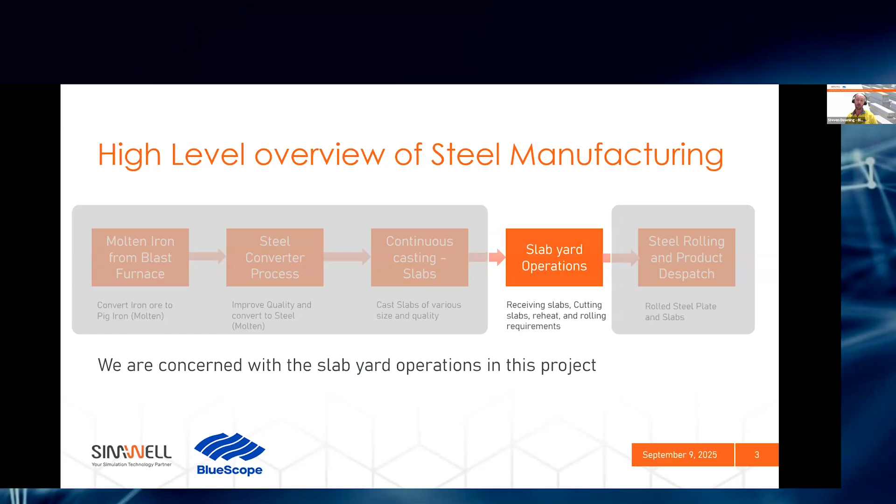Those slabs are then moved to a large warehousing processing area we call the slab yard. And from there, the slab yard takes those slabs and puts them into one of our two hot rolling processes. Here in Port Kembla, we have a large hot strip mill making coiled products and a significant plate mill. So today's investigation is around our plate mill operations and how the interactions occur between a large project in the plate mill and the slab yard.

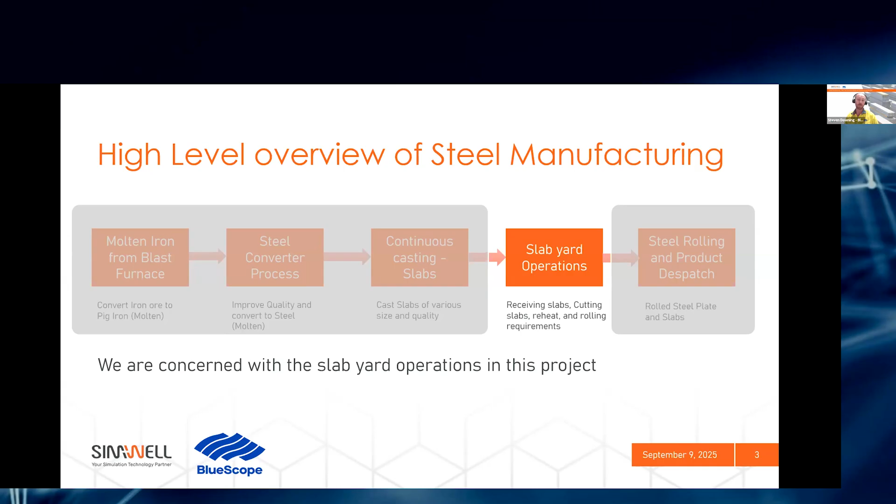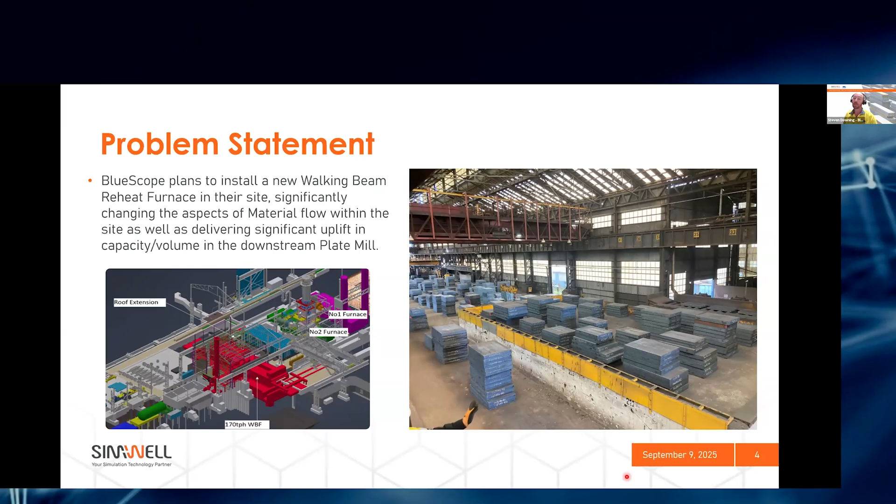So if we could continue on, this introduction of a very large new structure in this warehousing processing facility straight away threw up some concerns around the impact on their operations. We were going to increase demand, so throughput through that yard was going to significantly increase with increasing demand in the local market, as well as increasing capacity from the new furnace. And it was also going to have the corresponding effect of reducing the storage that they had to work with. So it was going to make things difficult on two fronts for the slab yard.

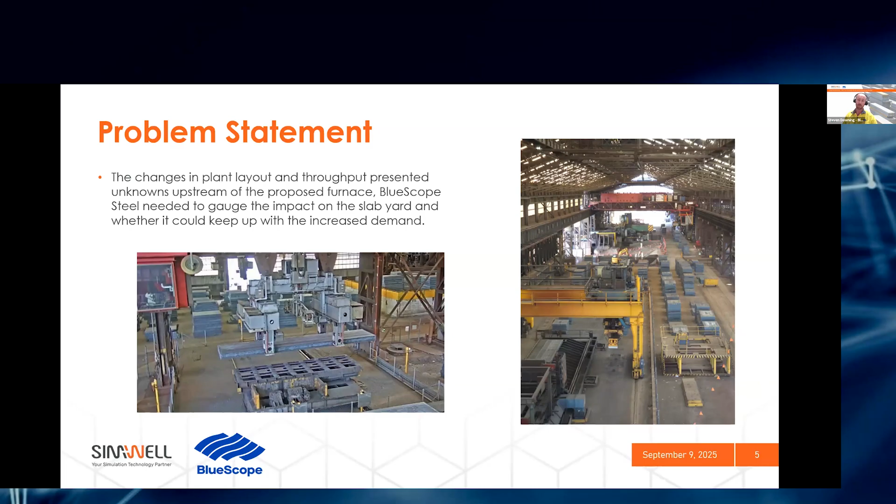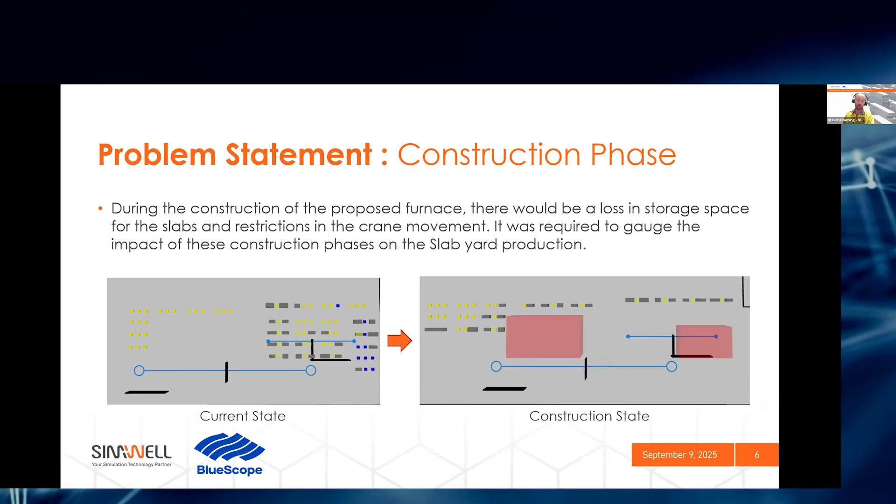And we've had to introduce these red blocks, which represent some of the old and certainly lots of the new structure, which the cranes cannot pass over. So it makes it much more difficult. The length of travel and time to provide slabs to our furnaces will be greatly increased. So the problem was straight away complex. Some people might say it's just a warehouse, but there's a lot of inventory management and processing of our slabs occurring. For instance, our slabs actually arrive as 12-meter slabs, and they have to be subdivided down to approximately 2.5 to 3 meters to be able to be entered into our process at the plate mill.

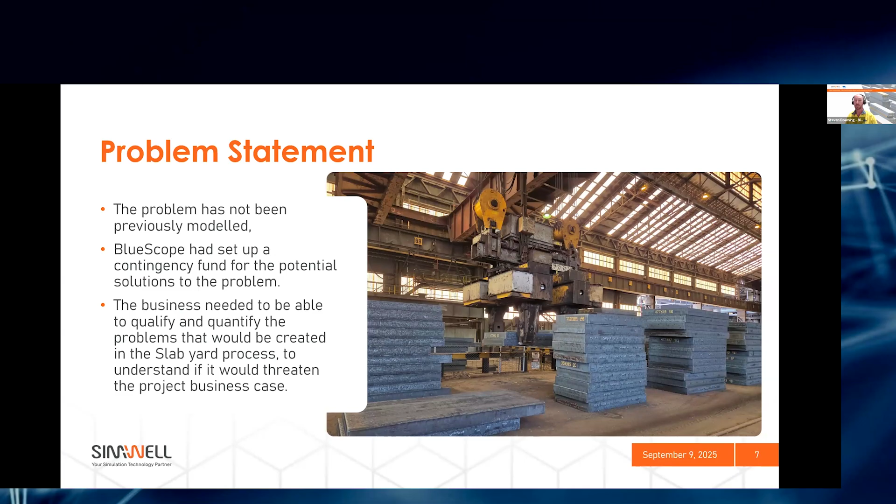We knew we were going to have to meet this challenge, but our project was also well underway. So we established a contingency fund in excess of tens of millions of dollars, without an actual clear picture of what the solution would be, but also not exactly a clear picture of the problem. So we needed to set out with an approach that could both qualify and quantify the problem that would be created in the slab yard processes, and to understand how that might threaten our overall business case and what the solutions might look like.

So to summarize some of the key points of those challenges: as I've mentioned, the increase in production throughput volume through the yards, and the loss of the storage space, making that increase even more difficult to deal with. The modeling of the cranes is essential to this process. As a warehouse, the cranes are the lifeblood of that. And we have very closely controlled interactions, which previous modeling of other crane processes in other projects has revealed to us would be a difficult and not a simple item to model. Then as well, there's the priority tasking of those cranes. It needs to be dynamic. The priority one moment might be one way and then need to be overwritten to a different priority as the emerging process changes.

Due to the restrictions, particularly during the construction phase, there were a number of areas that the cranes had to be forced to avoid to keep people safe, and also to keep equipment from potentially being destroyed if a slab was to drop. And then there's, of course, modeling and managing the transfer car, as there are 2 yards in this setup. So we need to manage the inventory between both of those and the space that the slabs occupy. And as I've mentioned before, modeling of the slab cutting process, which is essentially a process within the process that needed to have its own representative structure.

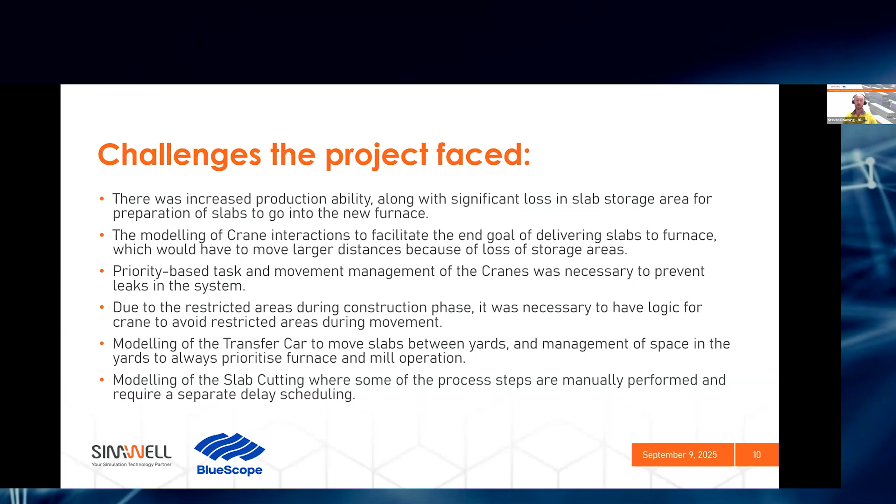As we continue, so why simulation. It became very clear to us very quickly that there was no spreadsheet exercise that was going to lay out our problem and give us the granularity or understanding of what we needed. We needed detailed, complex process modeling.

The range of requirements, the rates, the competing rates between our rolling process versus the heating process that was required, versus the throughput through our cutting, our inventory management, versus the completely seemingly disconnected process of how the slabs enter the yard. All of that just couldn't be made up from artificial schedules.

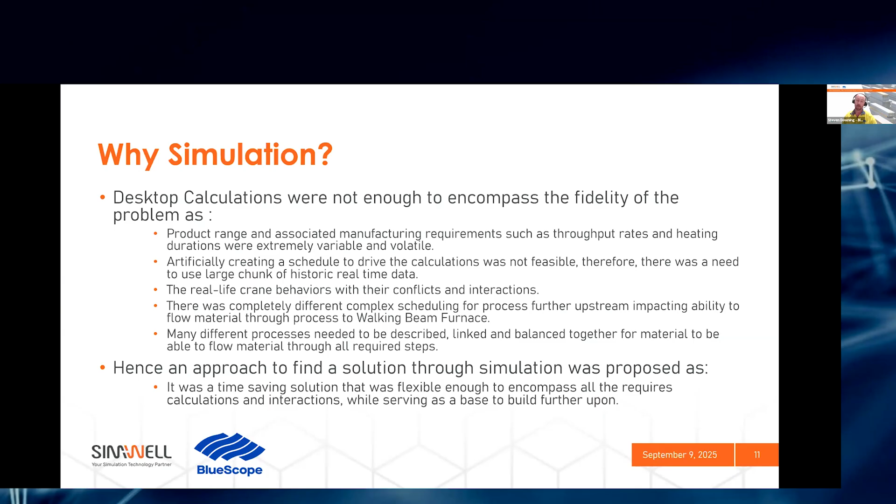Then you add on top of that the imperative need to have real-life crane behavior in those models to achieve the efficiencies that we would need and what we actually do achieve. And the complexities of running all those different separate schedules from start to finish in the process, and keeping that all balanced along with our inventory, not exceeding any limits or depleting in different areas. Hence, a simulation was the only way forward.

And so AnyLogic has long been the software of choice in BlueScope. In fact, it was the only processing simulation software that we will allow any of our areas to engage with. So that led to us engaging with SimWell, a great fit for us, a natural choice for their experience with AnyLogic and their ability to deliver on and meet the complex requirements that we had. So I'll pass that back to Siobhan.

Thanks a lot, Stephen, for the beautiful introduction. Other than the familiarity and experience SimWell has with AnyLogic, there were a lot of technical advantages that AnyLogic would have provided us with in the context of this project. The model needed custom agents, as Stephen explained, to adequately represent the complexity and interaction between the cranes and other equipment in the slab yard. With the added ability to combine agent-to-agent communication, agent-based modeling, and discrete-event modeling, AnyLogic proved to be a tool that made this complex interaction smoother to implement.

As it is a code-based environment as well, with the added ability to modularize the code components to further build upon, it was a no-brainer to go ahead with AnyLogic, as we were going to do further scenarios to build upon. And now let's get into the technical bits of the model.

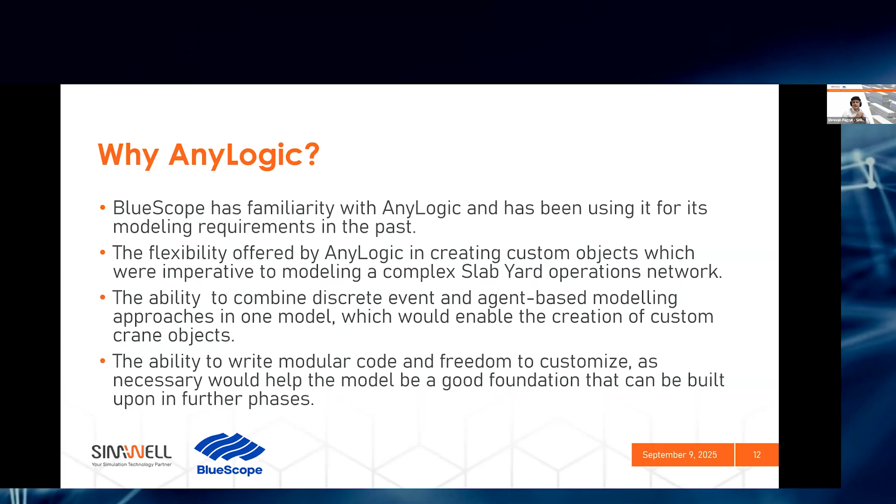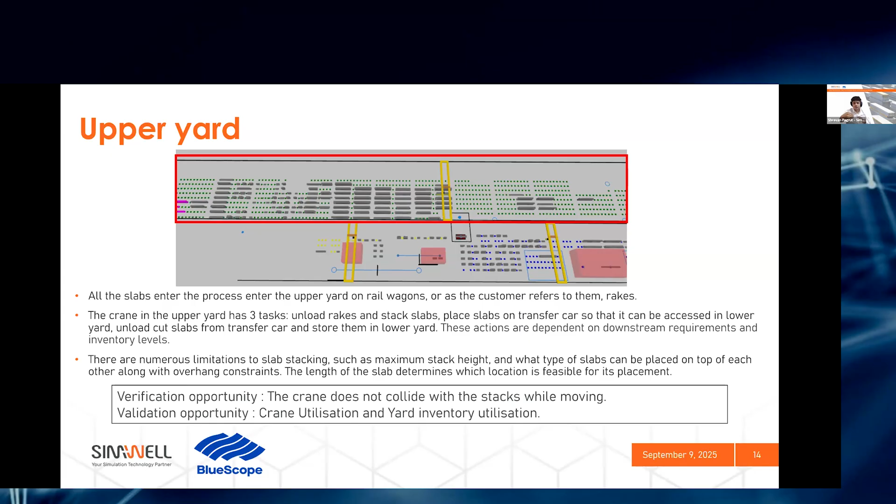The stacking of slabs is determined by the maximum stack height, the dimensions of the slab, and there are overhang constraints as well, which define how much a slab can stick out beyond a particular limit. The upper yard crane moves the slabs from rakes to the yard, as well as from the yard to the transfer car, and from the transfer car to the yard as the transfer is required.

Going deeper into the rakes, the slabs come into the upper yard on rakes, as I mentioned. When a rake comes in, a request is sent to the cranes, and depending on what the crane is doing at the time, it determines the priority of the tasks, and it starts unloading one wagon at a time. You'll see slabs have arrived on these yellow wagons, and these blue ones are the slabs, and you'll see that the crane is moving to unload the wagons.

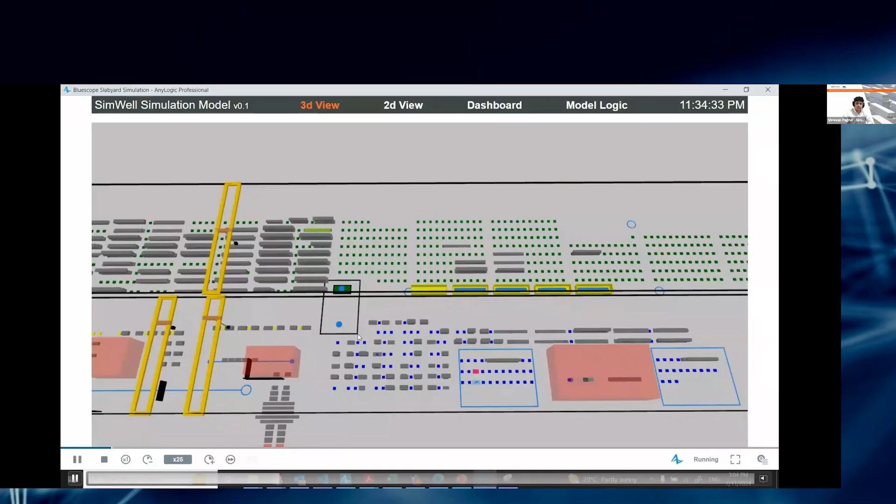The lower yard is basically where the bulk of the slab movement and processing happens. Bigger slabs enter from the upper yard through the transfer car. From here, they enter the lower yard, and these slabs then move into the slab cutter on the bottom right here, where they are subdivided into smaller slabs as per requirement. The movement of all of these slabs is based on a fixed sequence that needs to be charged into the furnace over here, which drives the slabs being cut and transported.

After being cut, they are transported to an assembly area. So after the cutting here, they are transported here into the assembly area, after which they are transported to the charging area. As Stephen mentioned, charging is the process of putting the slabs in the furnace, to simplify it a bit.

This charging is being done by the left crane that you see over here, which is a magnet crane, so it can only pick up one slab at a time, while the right crane that you see over here is a tong crane, so it can pick up multiple slabs at a time. So we try to bring multiple slabs into the charging area, but we need to make sure that they're in the correct sequence.

So the top slab is the next required in the furnace, so that we're not asking the left crane, which can only pick one at a time, to do digging and find the slab that it needs to. It's just always available to it on the top.

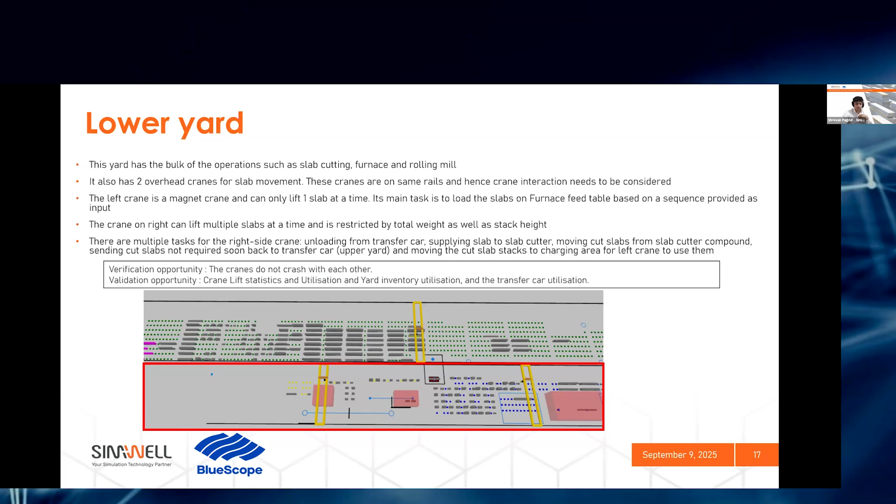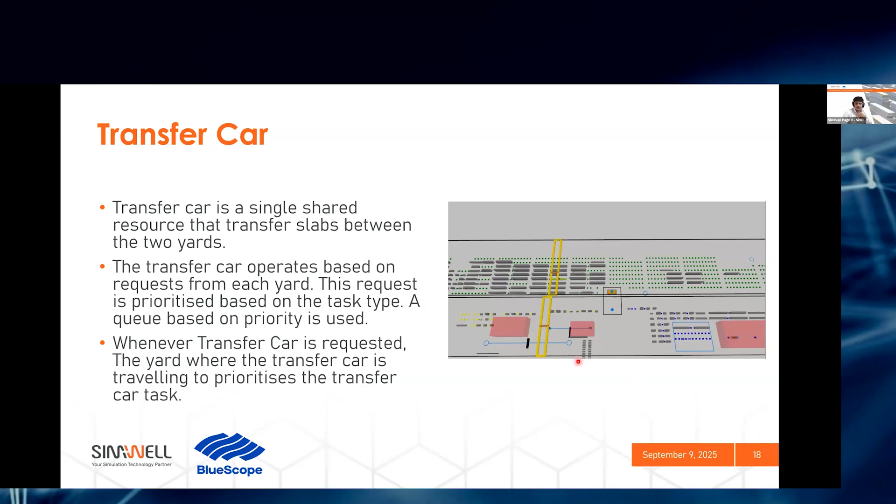The transfer car is another important component which handles movement between the yards, and as it is a single shared resource between the yards, it is necessary to model the working and utilization of the transfer car correctly. The transfer car operates on two layers of priority. When a task comes in, it is put in a queue ordered by the priority of the task inside the transfer car, and when a transfer car picks up a task according to the priority, the yard where the transfer car is prioritizes the task to supply to the transfer car.

So here you'll see the transfer car is in the upper yard and it wants a slab. So the crane brings in a slab. That slab moves to the lower yard, and then the right crane in the lower yard basically prioritizes moving out the slab from the transfer car so that we can have the transfer car free as quickly as possible.

The slab cutter, as Stephen explained, is a process inside the process. So it's an operation within the operation, sort of, where it has a cutter with two beds. So here you'll see that we have two beds over here. And there is also a crane that moves inside this compound, which is marked by the blue rectangles, to load and unload the main cutting process.

The crane movements have not been modeled physically, but as a mathematical calculation of the movement time, because there were a lot of manual processes and interactions there. So it was decided that it was better to model it as a mathematical calculation of the time.

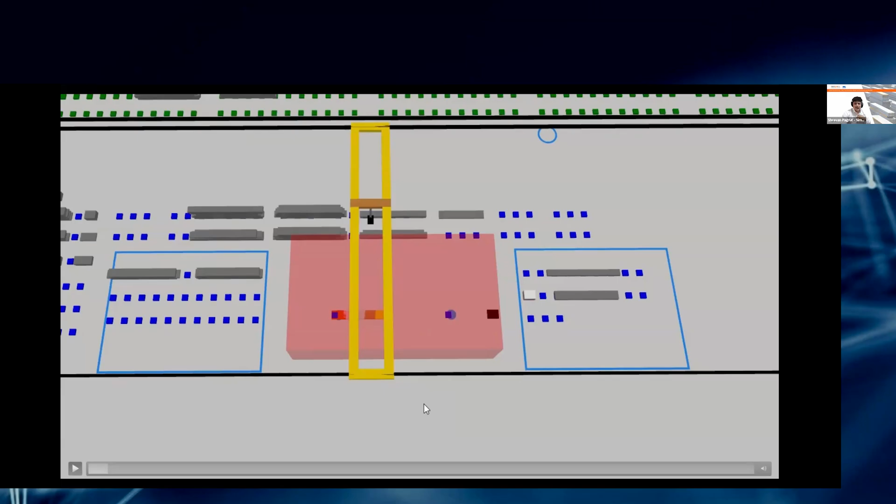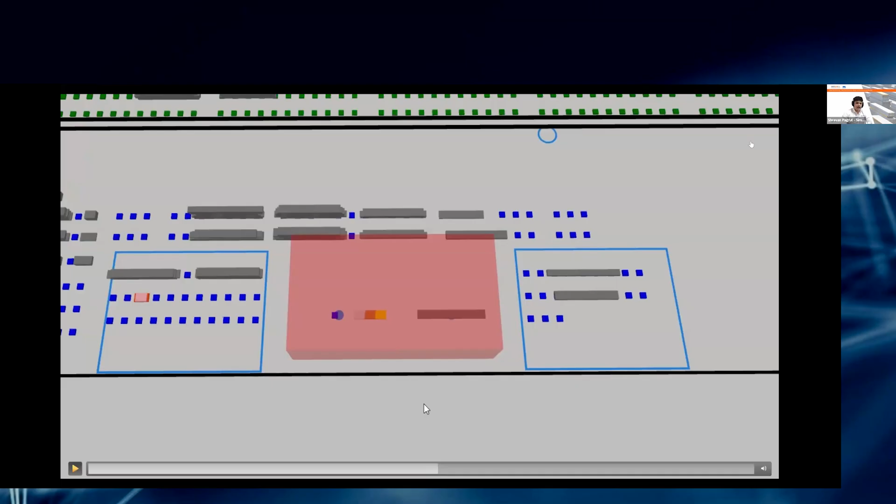And here you'll see that a slab is loaded onto the right cutting bed. So you'll see a slab magically appear, which is the mathematical calculation. And then it is subdivided as the slabs on the left side have already been done. And then these will be unloaded, as you can see, on the compound area, after which the right crane in the lower yard will pick it up and move it to the assembly area.

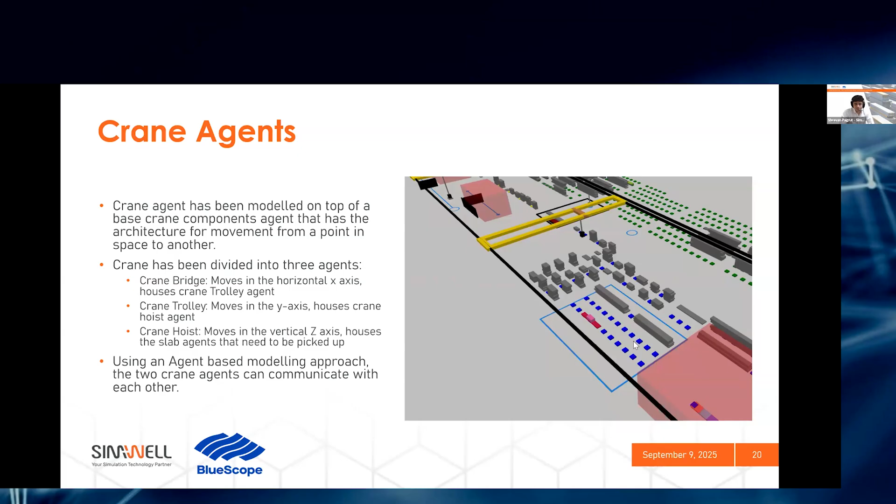The crane being an important part of the slab yard, it had to have a bunch of custom movement patterns to it. Hence, a from-scratch approach was used to model it. And it was decided that it would be hierarchical in nature, where we'll have a base agent and we'll build on top of it. And here we have basically a crane base agent, then we have the crane bridge, a crane trolley, and a crane hoist on top of it, which have their own movements. So the crane bridge will move in the x-axis, the crane trolley moves in the y-axis inside the bridge, and then the hoist moves in the z-axis to pick up the slab, which will be better explained in this video.

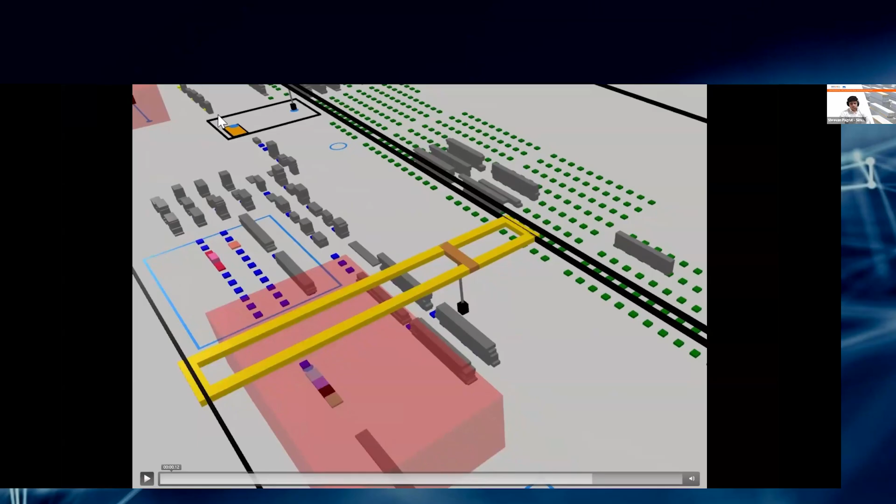Here you'll see that the crane needs to put a slab somewhere. So first it positions itself over the stack where it needs to put the slab into, and it first moves its X, which is the crane bridge, the yellow part you see here, then the trolley, which is the brown rectangle that you see, and then the hoist will be lowered to put the slab into the stack it needs to.

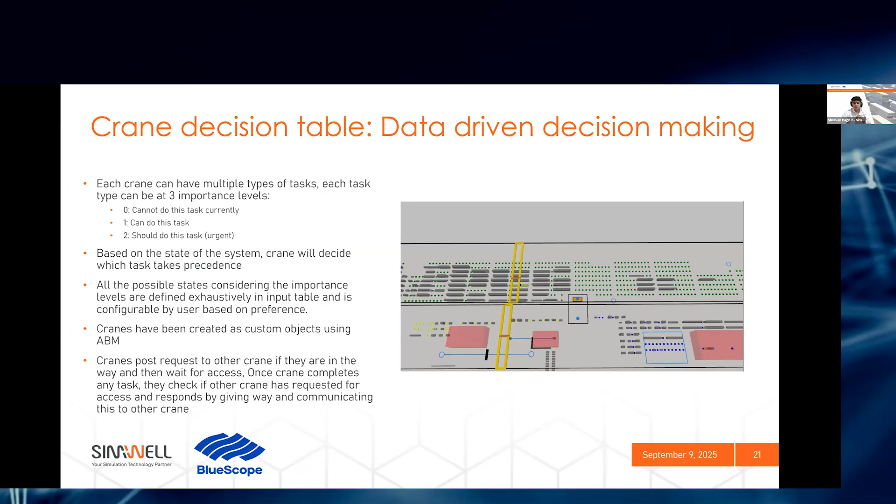And as the cranes have to do a variety of tasks, as Steven said, it is important that the crane picks up the task that is correct, so that we are ensuring efficient supply of slabs to the furnace and thus efficient working of the slab yard. The crane used an input table to determine which task to prioritize. Here in the video, you'll see the same example of a transfer task that has come in, and as it is important that we prioritize this task, the crane, after it's done with its earlier task, will prioritize this task over anything else.

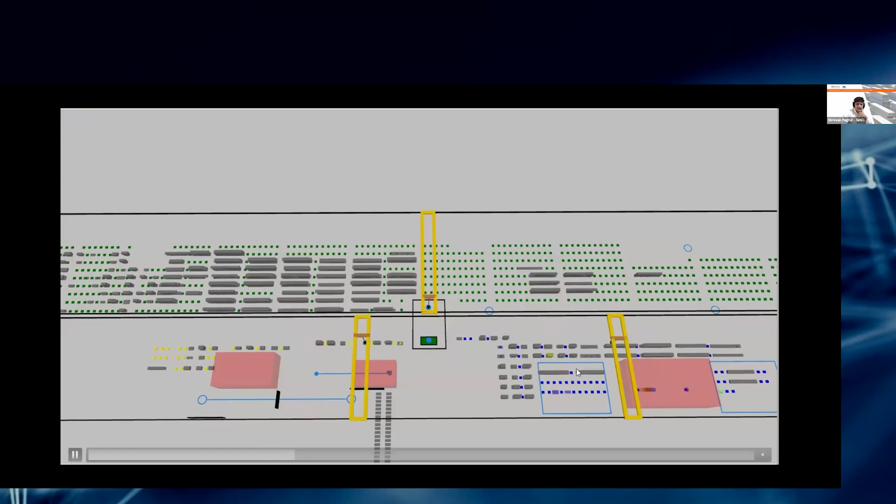And what you'll also see in the video is an example of crane shadowing or crane interaction, where the right crane has to move in to supply slabs into the charging area, for which it will ask the left crane to move out of its way. So right now it has asked the left crane to move out of its way. And similarly, because the left crane will now have to charge slabs into the furnace, it will ask the right crane to move out of its way, as you can see over here. And as it goes further out, it again asks the crane to move out of its way so that it's able to charge.

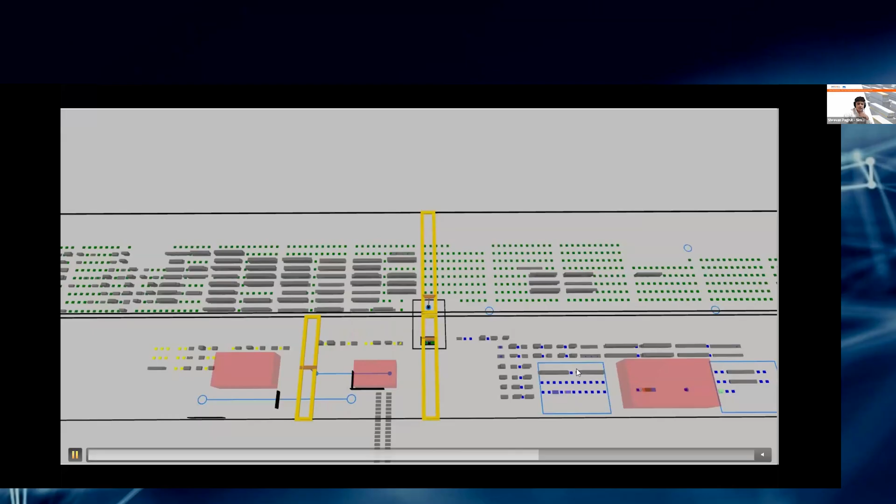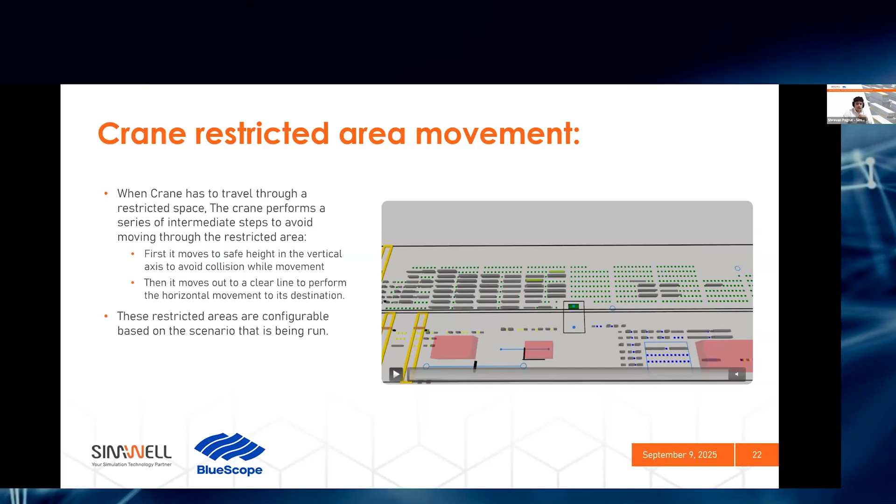Another important bit was during the construction phase, there were areas that were restricted to cranes as we don't want slabs to be transferred over equipment or workers. To accommodate for this, restricted areas were created, which are here marked in red, and it was made sure that the cranes take a path which is avoiding these restricted areas, but at the same time efficient enough so that we're not causing issues.

So here you'll see the left crane has to pick up a slab over here. So it basically moves out of the way of the restricted area, picks up the slab, and then moves back.

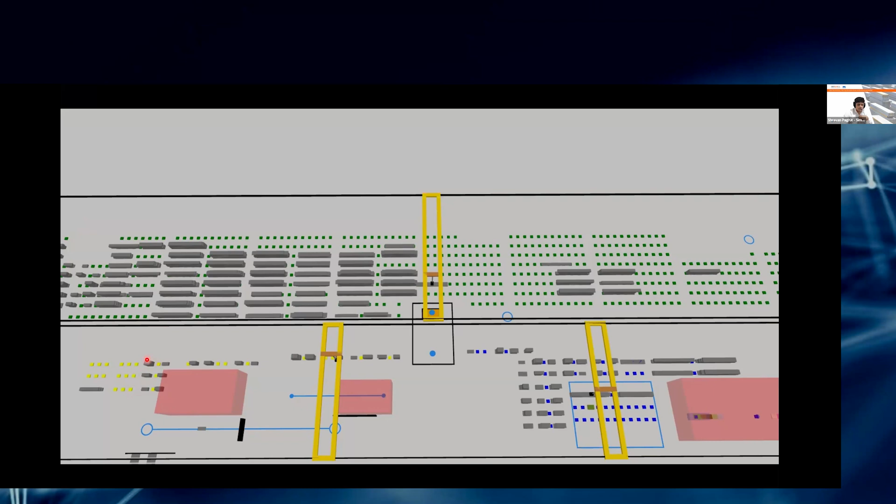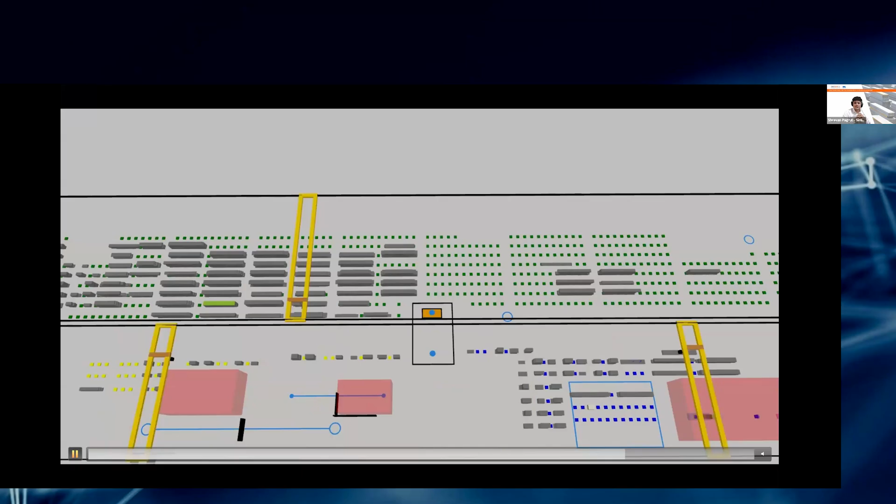And this is the last screen bit, which is the digging out of slabs, which is another important part. It is necessary to supply the slabs in required order to the furnace and charging area, as I explained earlier. And often to access the required slabs, they need to be dug out from the stack. So we need to remove the top few slabs to get to the slab that we need.

And we also make sure that we're not only supplying one slab to the charging area, we try to supply a bunch of slabs depending on how easy it is to dig out those slabs from underneath the slabs they are buried by. And then these are moved. And the model implements this digging out of slabs and also looks for the next slabs, as I said, that can be transferred over at once in sequence to efficiently use the crane.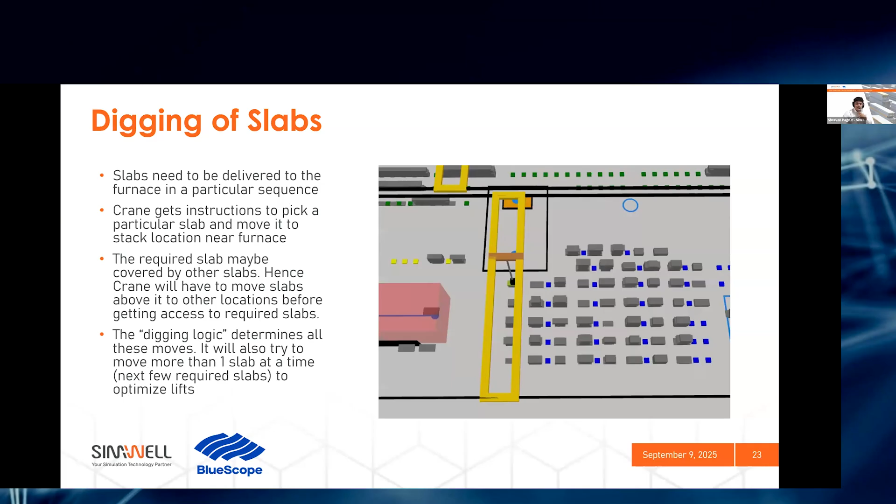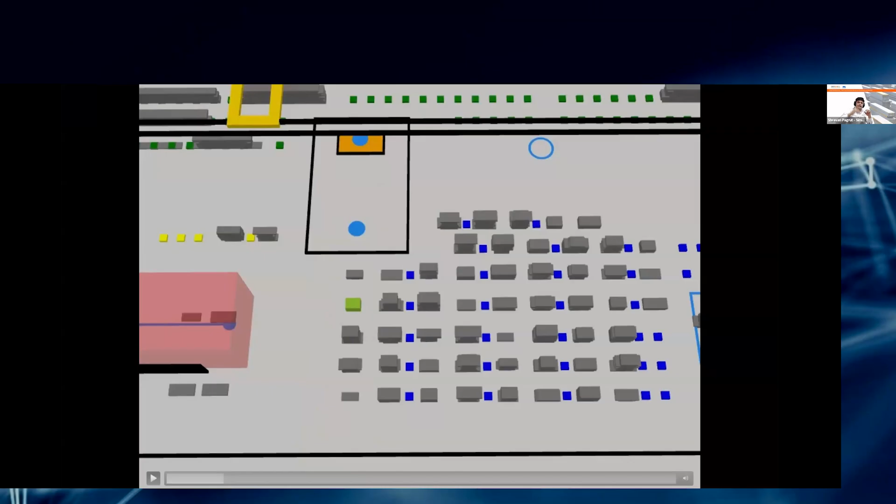Here we see an example where basically the required order was in the reverse. So the slabs in green right now are in the reverse order of what they need to be in to be supplied to the furnace. And here you'll see, this is an extreme example, but here you'll see that the crane basically separates them out and then picks them up in the reverse order to make sure that we're supplying in the correct order.

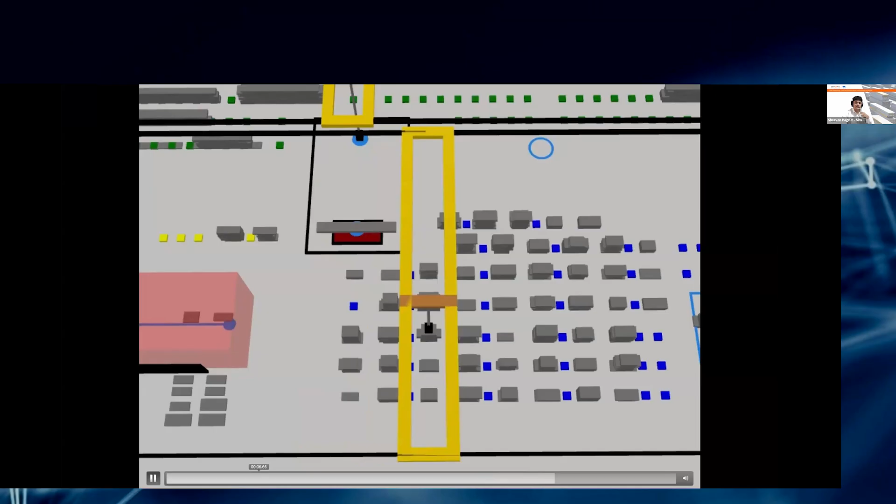Yeah, so here we have started picking them up in the reverse order. And then these will be moved out to wherever they need to be. So yeah, it was quite interesting modeling all of this.

And another thing was after the crane and slab yard operations, the slabs from the charging area are charged into a furnace, where the main change of operation occurs between scenarios because we have a new furnace there. We have modeled three main modes of operation for the furnace: the single and dual pusher furnace, which is the current operation, and during the construction phase, this is the operation that will remain. And the walking beam furnace, which is the future state of operations.

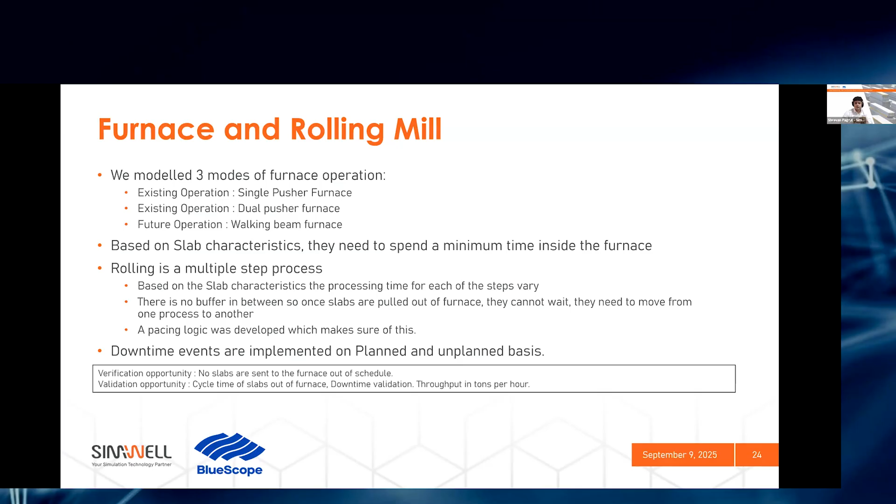And after the furnace, the slabs are moved into a rolling mill. And rolling of slabs is a multiple step process, with each process taking a different amount of time for different slabs. And to make sure that there aren't any slabs that are waiting on the process steps and there is efficient throughput of slabs out of the rolling mill, a pacing logic was developed to ensure that the model will have the correct demand from slab yard and furnace.

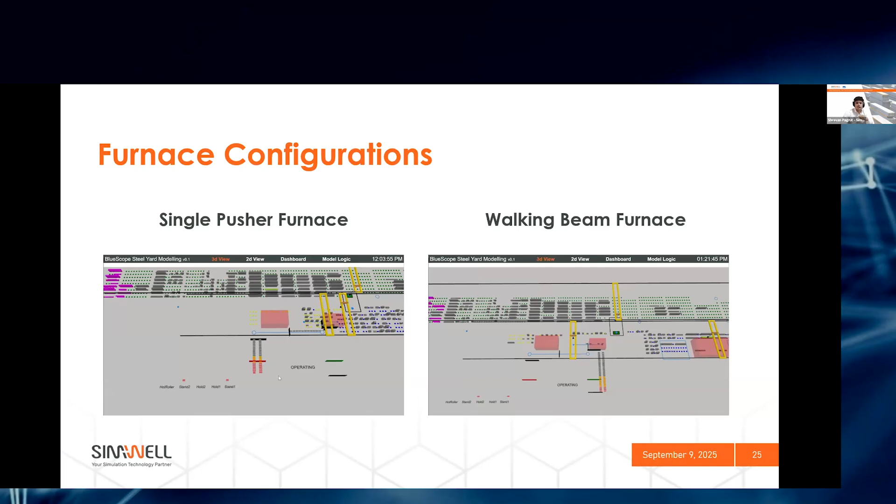Going a bit deeper into the furnace operation, the model operation is quite different for the two furnaces. For the single pusher furnace, we see that a single slab will be pushed into the furnace, and that prompts it to push out a slab to go into the rolling mill, which is the bit that you see over here. So this is the rolling mill, and this is the furnace.

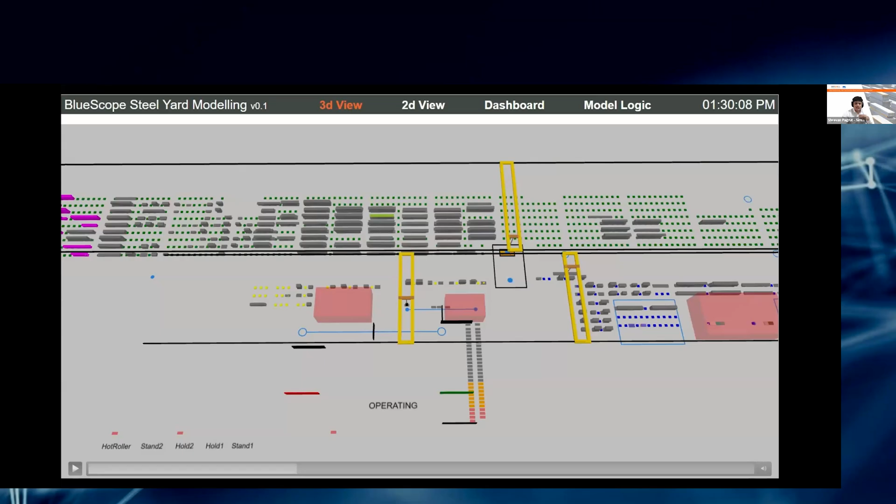While if we look at the walking beam furnace, we see that it's a longer furnace, 30% longer in fact, and then we charge in the slabs two at a time, and then they are released as, as I said, there is a pacing logic that asks the furnace to give out the slab when it's done. The color here represents the heating stage that the slab is in.

After all of this, after the modeling was done, verification was done to make sure that the model logic is accurately representing the constraints we expressed. A number of criteria were checked and confirmed to be correct. The cranes were ensured to be prioritizing the correct tasks and not colliding with each other. It was made sure that the charging and stacking of slabs was done in the correct sequence along with a number of constraint checks.

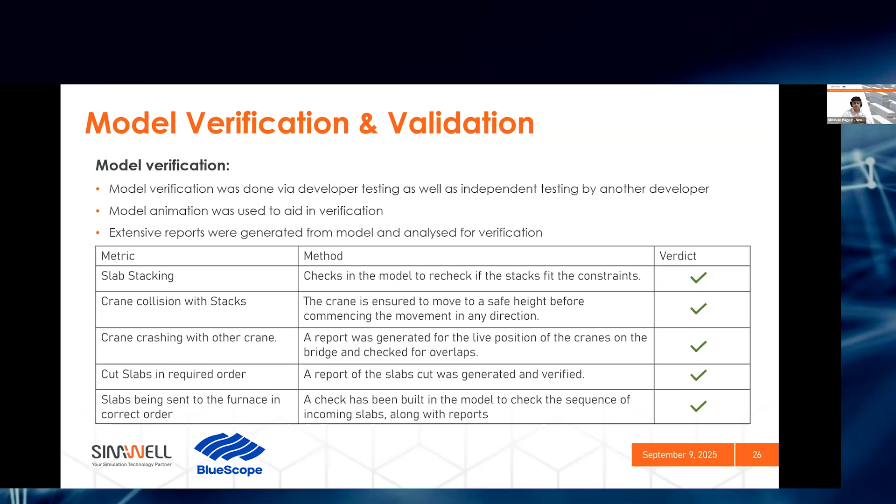After gaining confidence in the model's ability to reflect its inputs correctly, we moved to the validation, where we made sure that the model was an adequate representation of the historical performance.

Factors such as equipment utilization and time usage model were validated for the cranes and the cutter equipment, and cycle times and throughputs at the furnace and rolling mill were also validated against the historical actuals. This ensured that we were operating at the correct rate and with the correct operating hours. The validation process also helped BlueScope gain confidence in the model and run future scenarios with it.

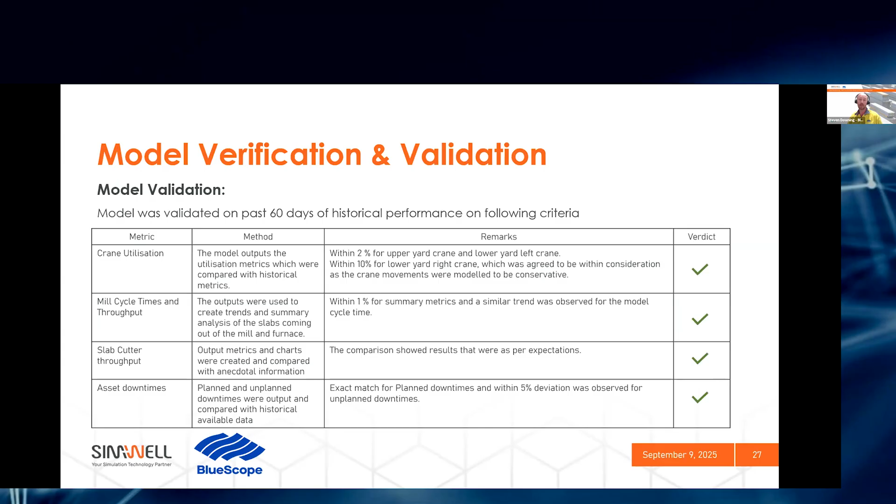Some of the most valuable part of that was we knew the construction period itself would be the most difficult to manage from a safety as well as a process perspective, and being able to supply slabs into our plate mill. They built confidence that the slab yard process as it was would be able to keep up with single furnace operations. When we run dual furnace, our demand for slab increases by about 30%. And we were able to show preemptively that with the extra travel time to go around that construction zone, it would be very challenging, to the point where it would be very disruptive to our rolling process for potential delays.

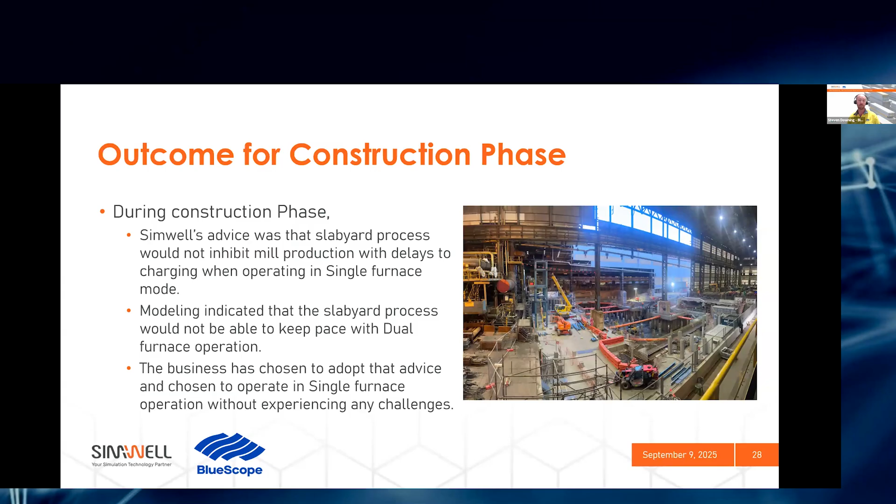So that enabled us to provide advice to the business around the best way to proceed during this time. Fortunately, or quite unfortunately perhaps, our order book has been low, so single furnace operation has been sufficient to keep up with all our customer demands. So we adopted the advice around that for our construction period. As we look forward into the future, on our next slide,

we were able to show that post-construction, when we were able to reclaim some of the yard, and we established the rate that was required for the new furnace, there were definitely some challenges that needed to be overcome. The value of this process was we could actually put a size on those challenges, what type of delays might occur, and work with SimWell to introduce at the later stage of the process some novel solutions, some changes primarily to layout, to create more inventory space in critical locations, and to work with our slab yard to see what was realistic.

And we were able to actually come up with some solutions that were well within our contingency. In fact, from a contingency of multiple tens of millions, we were able to come up with two key items that together were sub $1 million to implement on top of our existing budget. So the value of SimWell partnering with us on our project, to ensure that the business continued to have confidence in the value of our project, and to ensure that the future operations would be stable and able to deliver for our growing market, was huge.